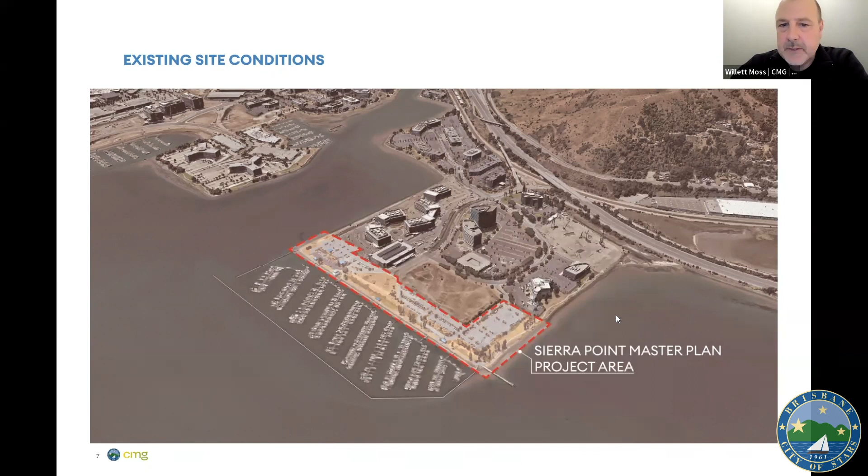Existing conditions are probably familiar to you, certainly to people that go down to the yacht club. North is up, essentially. The red line shows the boundary of the study area. You can see that the open space and parcels that are publicly owned are dominated by parking, with parcel R, where originally, in the master plan days, a restaurant was to land.

As you know, the Bay Trail wraps around and becomes the point of access and connection for the marina. It's also worth noting there's future retail proposed in the existing parking garage that anchors the ground floor right at its connection to the public open space, which we see as a benefit. Additionally, there are plans for a hotel on the parcel to the north that will also have an open space connection, with ideally co-benefits between the hotel operation and the public open space.

Again, it's worth noting how much open parking, although on private property, there is, including this garage I mentioned as the retail component.

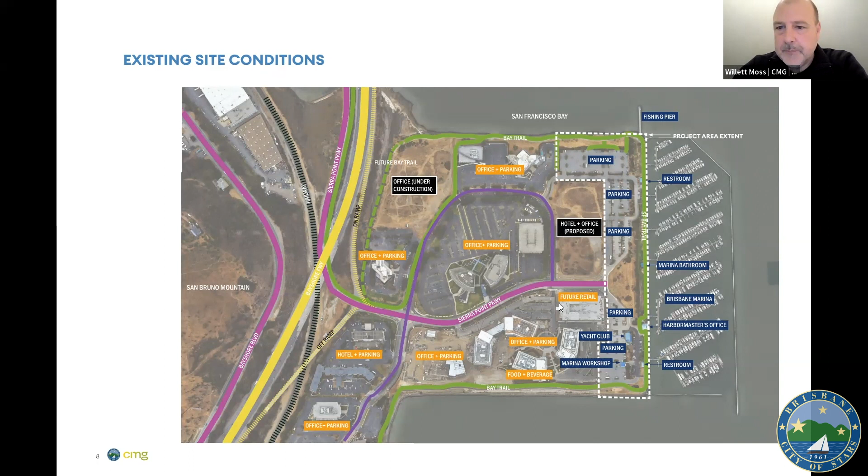This is a topographic map of the existing conditions, and we bring it up to note a couple things to keep in mind as we talk about the plans. One, it identifies where there are existing bathroom facilities, the yacht club, the harbor master's building, the marina workshop, and a significant trash enclosure upland.

The existing Bay Trail and the promenade that connects to all of the docks is at about an elevation of 9. King tide storm events, as we'll see in some diagrams, currently come up to about that elevation. I bring this up because much of our work is considering sea level rise and the projections for that and the implications on the site.

The other thing to note, as you well know, is that Sierra Point is a landfill. It's made out of garbage, rubble, and refuse, bound by a riprap perimeter. The green line on this plan indicates the top of slope of that landfill, which then quickly tapers down, sloping to the waterfront. This becomes relevant as we think about sea level rise and what amenities are outside of the projected sea level rise elevations.

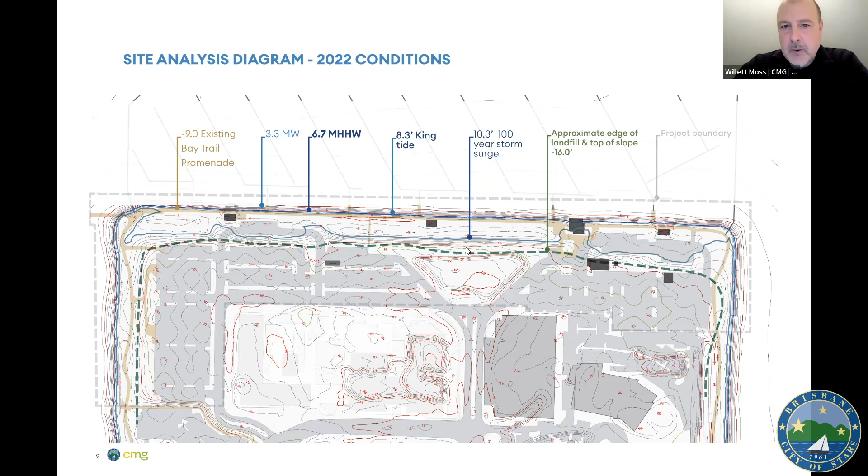Again, I want to note the bathrooms and Harbor Master's building in the context of all of this. Here we see a diagram section of the existing conditions, and you can see the 100-year storm surge, which is pretty much what we just experienced in the last few weeks.

It did overtop the parking lot that you can see, and it comes up through the drains also. Pretty dramatic image in the middle of the dock entrances in the recent storms.

So what we see in the section is that we're right at the level of extreme storm events. King tide comes up to just below the existing promenade without any wave action, and the landscape behind the esplanade is actually down below mean high water, around elevation 6.

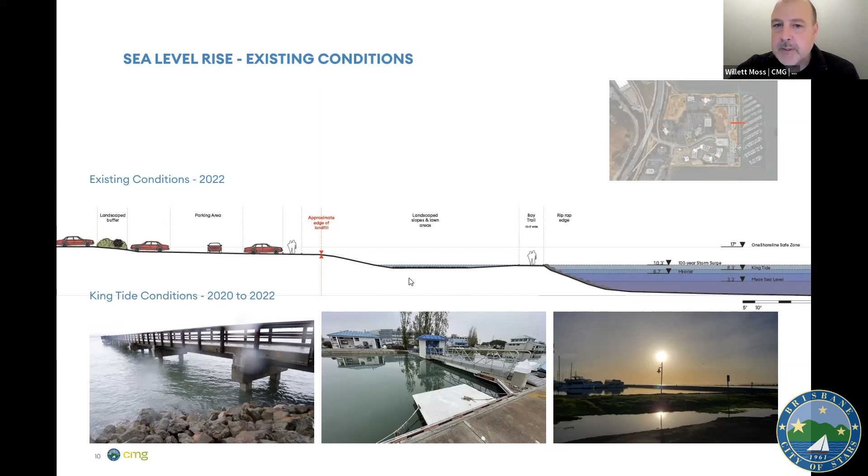So this sets up a series of conditions to consider relative to the long term. We use projections provided by the Bay Conservation and Development Commission, BCDC. They describe sea level rise in 2050, 2070, and 2100. We're looking at 2 feet of sea level rise by 2050 from what we have now, about 3.5 feet by 2070, and more than 6 feet by 2100.

Another jurisdictional point of consideration is the One Shoreline group working in San Mateo County, and they have established a safe zone for the 100-year projections at elevation 17. Now remember, the esplanade is at elevation 9, and the top of the landfill, fortunately, is around elevation 17. So this bodes well just in terms of sea level rise, when you don't think about all the other implications of water intrusion in the landfill and so on.

What it does bring to light is how the marina will be treated in the future. Will the docks be raised? Will the seawalls be elevated to meet these conditions? The marina is outside the scope of this project relative to the facilities outboard of the riprap edge, although we are keeping them in mind in the schemes.

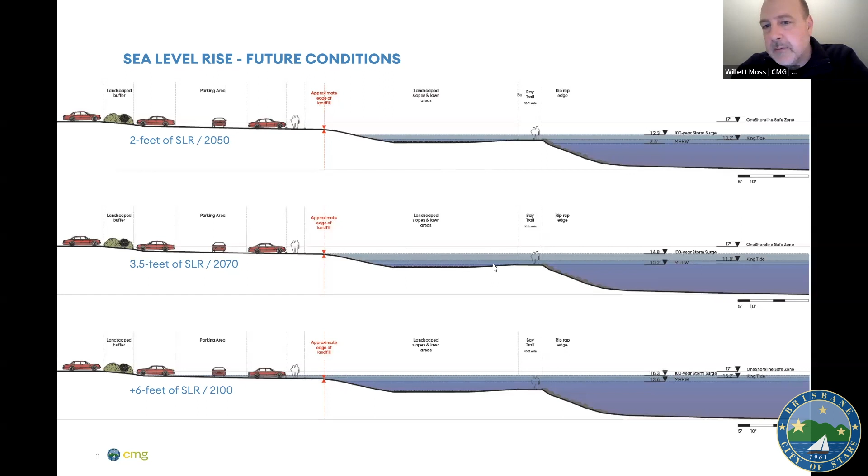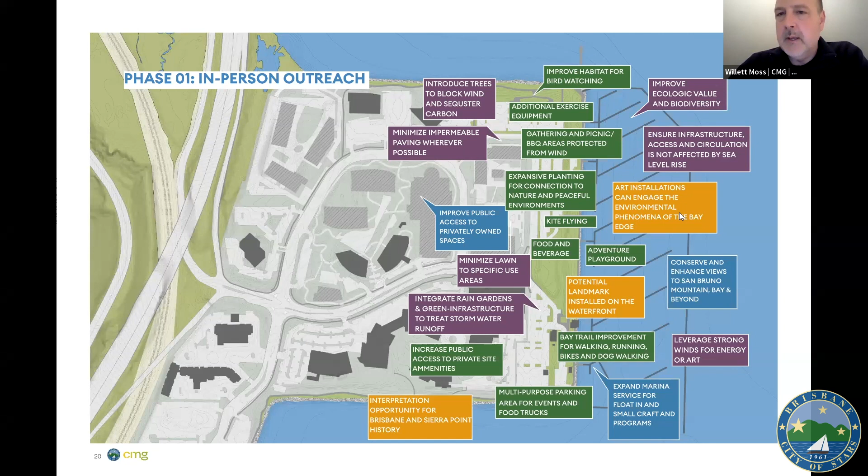So all of this is to say that we're hearing a similar voice across the board—that the marina will be maintained, the access to the broad views across the site, the bay, back to San Bruno Mountain, across to Mount Diablo and downtown—all of this is to be captured and heightened and improved upon. The call-outs here capture a variety of comments from our other interactions and meetings, like the day at the park and so forth, and conversation points. The yellow are specifically about art, the green are about program and amenities, and the purple are about resiliency. But they're all in line with what we see from the survey too, and little is contradictory to the main ambitions and goals we've heard from the city at large.

So as we think about all of these elements, we're also thinking about the structure of the open space and the site. To have any open space, we have to reduce the amount of parking.

There's about 11 acres of parking out on the site. We want to prioritize flexible open uses and spaces that meet multiple needs rather than having very fixed, very specific uses that limit the number of people. We do not want the park to include amenities and facilities that you can find elsewhere, either on Sierra Point in the privately owned public space or back in town.

Obviously, designing for sea level rise, as I showed in those diagrams, is of primary importance. We understand that there are many aspects of access to Sierra Point that need to be addressed. That's beyond the scope of this project, but we do know that access from downtown is key to the success of Sierra Point as a public open space for everyone.

We're designing up at about 60,000 feet. So it's broad gestures to establish character and quality, the kind of experience people hope to see, organizing the layout of the open space and the infrastructure broadly.

The master plan will be designed to continue the operation of the marina without changing its design. So the marina is valued and preserved. And certainly the critical facilities and circulation access will be maintained.

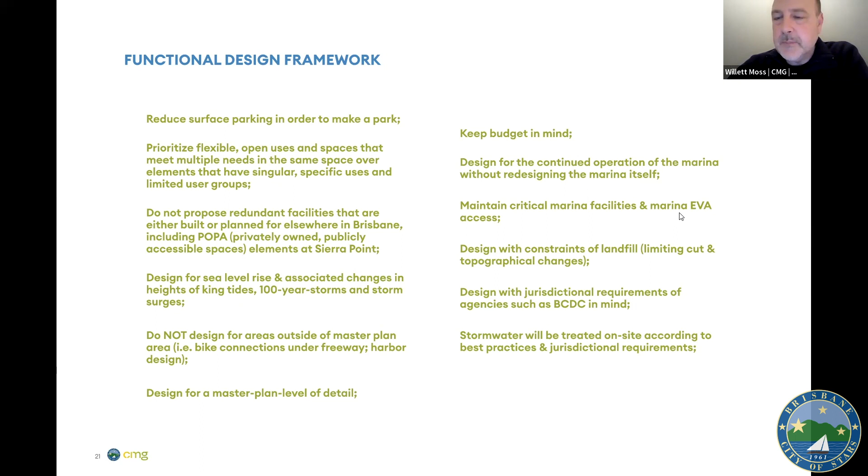The ambition is great efficiency. We have to design within the constraints of the landfill. There are weight limits on it and the cap, and what that poses to the design. BCDC, I mentioned, relative to sea level rise, and then treating stormwater is something that's integrated on site within rain gardens and planted facilities. So with all that in mind, I'm going to show you three schemes, but they have a basic organization that these diagrams describe.

There are existing facilities at the southern end, the right-hand side of the plan. These are the yacht club, the harbor master's building, the courtyard, and the shed. And also we're aware of the bathrooms down there, trash enclosures.

There is a perimeter condition that describes a functional zone. And then north of that so-called functional zone, we can imagine this is the area where we can start to modify that landscape, introduce planting, introduce new program.

Surrounding all of it, in anticipation of sea level rise, is a perimeter condition where we can start to accommodate and allow for water to ultimately inundate this area. And we're talking 30, 60, 100 years.

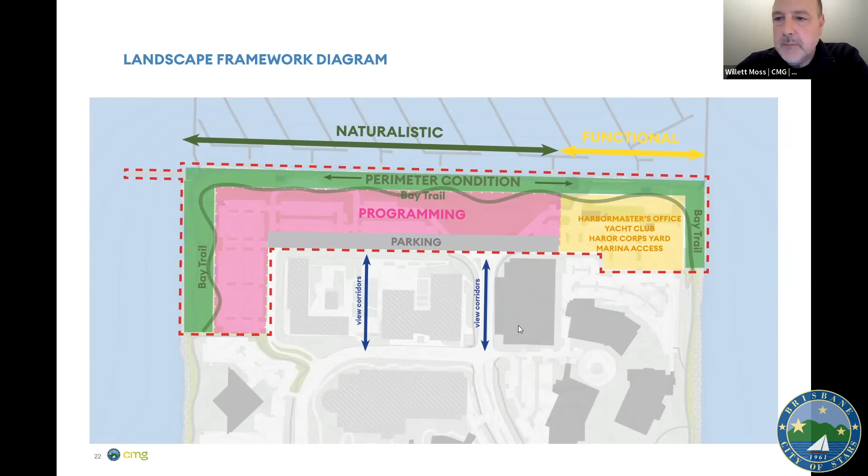Parking, obviously, is a major point of the conversation. The only attention to it at this time has been to suggest we can start to minimize it and right-size it. It's not to say we're not providing enough parking for the marina functions. We still have to figure out what those numbers are, especially in relation to the amount of parking that's offered off-site. If we think about weekend events where there's no one in the office buildings, there's an enormous parking garage adjacent to the open space, and there's a large parking lot.

This diagram is reinforced with planting strategies. So we would build upon the emergent wetland that's happening at the toe of the slope where water is already coming in, and we would create a native wetland environment along the toe of the slope and the edge of Sierra Point within this property. We would then transition to upland native plantings, and then there would be planting specifically for stormwater treatment that would pick up our paved surfaces and the parking areas.

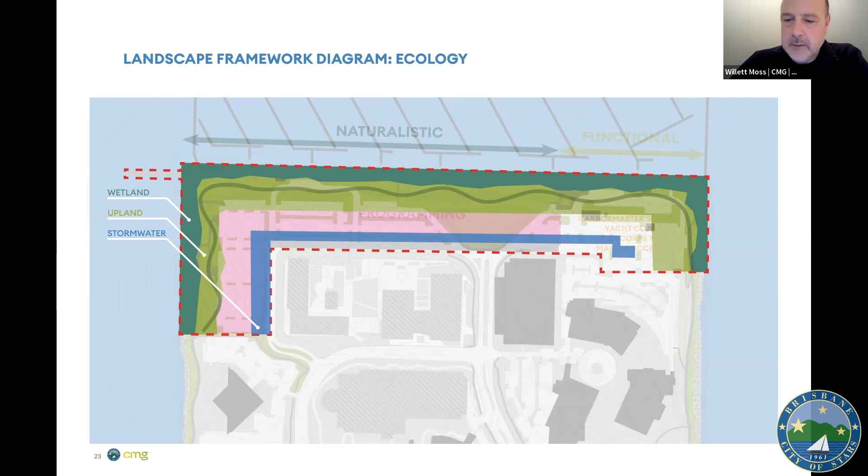Circulation is pretty straightforward in that we would maintain a BCDC compliant bay trail. I think the trail right now is about 9 feet wide. We would expand it to anywhere up to 18 feet wide. This allows for biking and jogging and walking. It allows for fire truck access to the docks and service trucks and vehicles. And then the parking areas would be served on the public lands from a loop road, essentially, that plugs back into the circulation of Sierra Point.

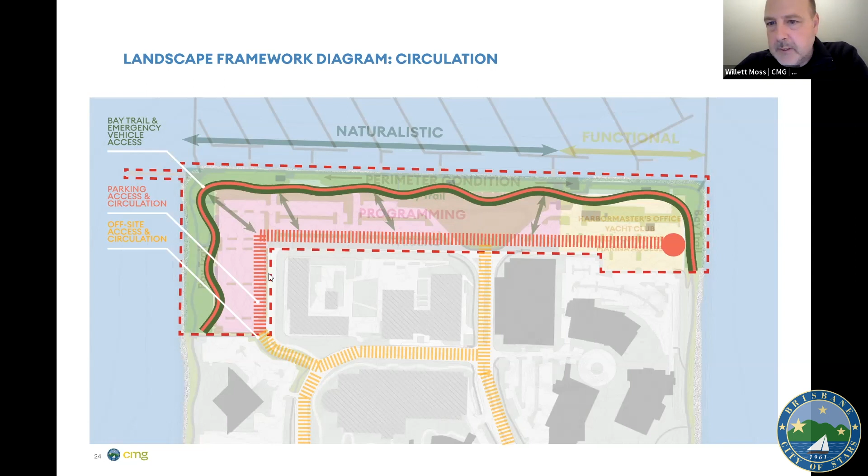So now I'm going to walk through three schemes, and as I mentioned, they each have common elements to them. What I want to note while we have these three up is that they're really distinguished by how they're treated at the north end, how they're treated at the southern end, and how they're treated in the middle, although these are more similar than how different they are between schemes at each of the ends. Being on site, you become really aware that the corners of Sierra Point become the most significant places and the most amazing of places when you're out there and you get those broad views across the bay.

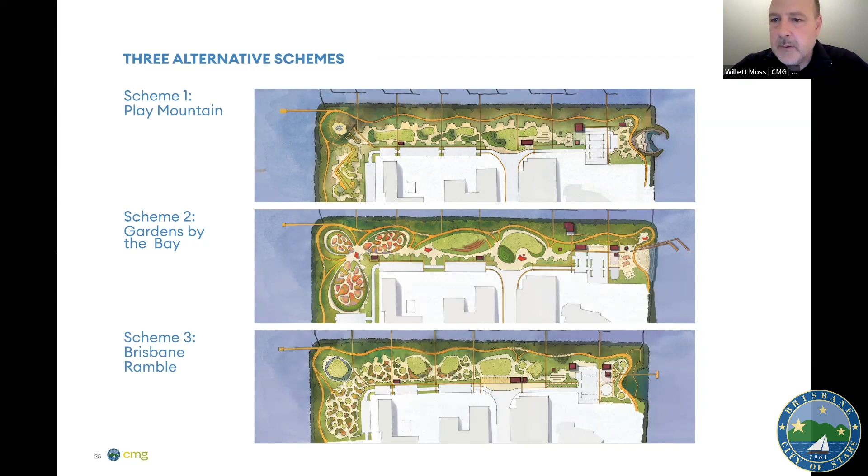Common to each scheme, we have native wetland and upland planting as described in the framework. We have a bay trail that's redefined with access to the marina, small craft launch, and multi-use lawns. I talked before about the value of having things that are multi-purpose, so you get more bang for your buck. Similarly with parking, we can think of these as plazas as well as parking lots when there's time and space.

Topographic features create unique environments and block wind and frame views. We're taking advantage of the incredible views across the bay with specific overlook moments and art installations that could be part of reinforcing or enhancing this experience. And our ultimate goal is to make a social environment.

Within all the schemes, although there aren't specific points drawn, there is an abundance of seating areas and picnic areas, group places, as well as places for individuals. Those aren't drawn on the plans, but they would ultimately be included and have been accounted for in the drawings.

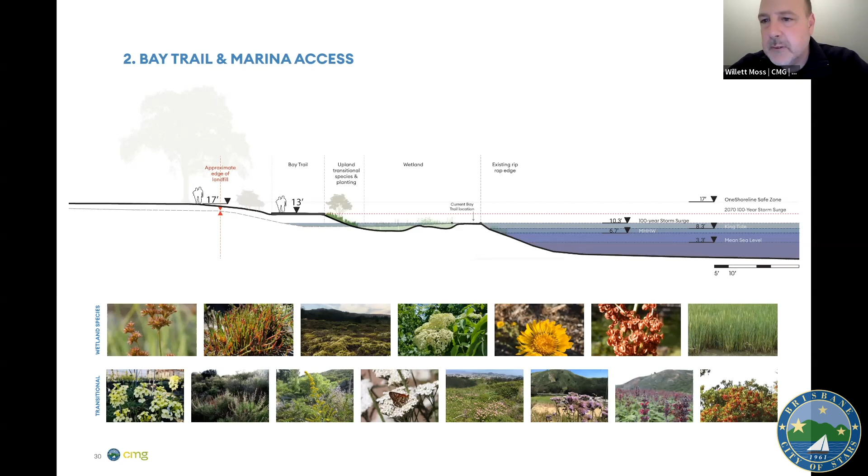We've heard from many that small craft launch and facilities are desired. There's a report, as I mentioned, by the city that describes its viability on the southern edge. So each scheme includes one of these launch facilities on the southern edge.

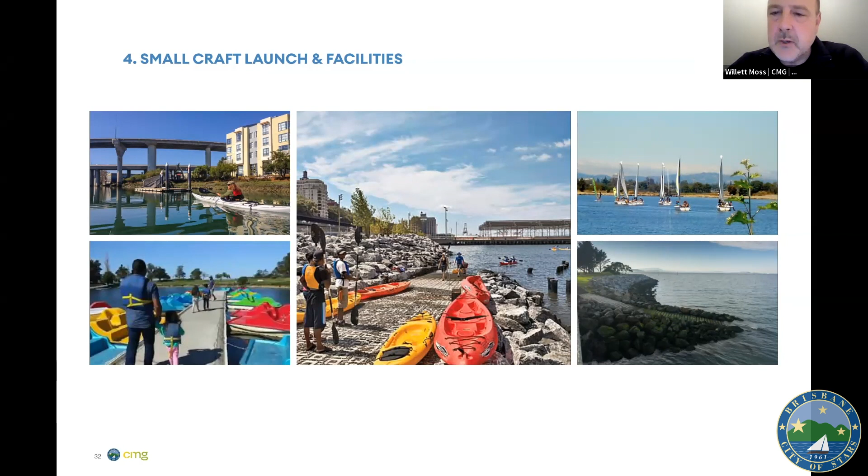We've also heard from many people about the opportunity for adding program for the boating communities. This is something outside the scope of this work, but we would want to include aspects of the design that could help fulfill new programs for water access.

Multi-purpose lawns, again, we talked about the value of just having flexible open space out there for various events that the city can run, and also just useful on a daily basis for people to throw a ball around.

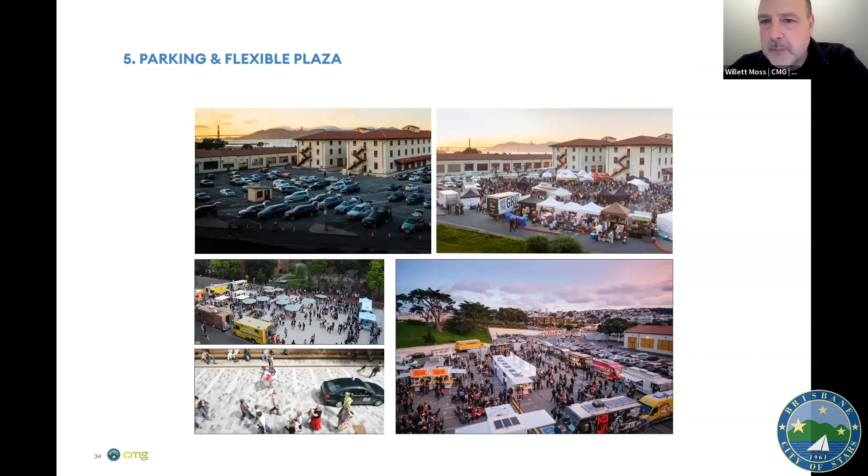Talked about flexible parking lots. It's an example on the waterfront, these slides at Fort Mason Center in San Francisco, where they take out their parked cars and create an off-the-grid pop-up.

We know that the city of Brisbane is beginning an arts master plan, and would imagine that consideration of Sierra Point art is included within that master plan development.

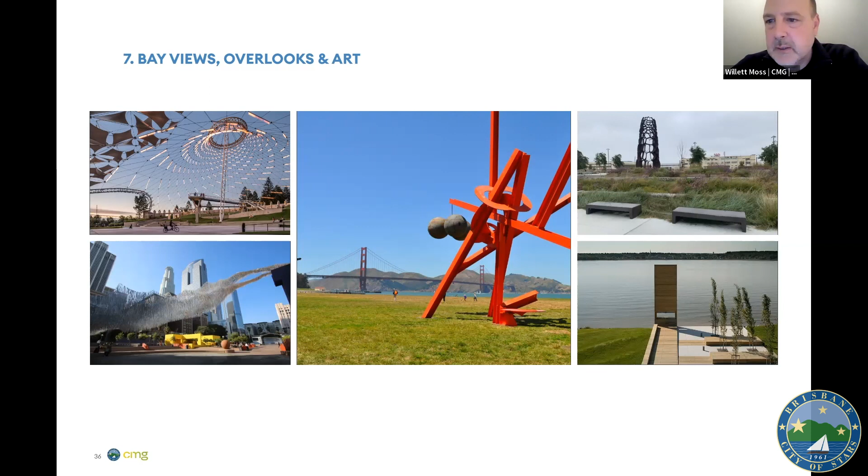And then finally, all of this is about connecting people to each other and to nature. Within all of these elements, as I mentioned, there are places for socializing and connecting to one another.

Okay, this is the last section, and we'll go through each of these schemes. Scheme 1 has elements that I'll mention here but are consistent with other ones. There's special attention paid to the north end and the south end, and a planting of trees along the perimeter to block wind and be a threshold into the park experience.

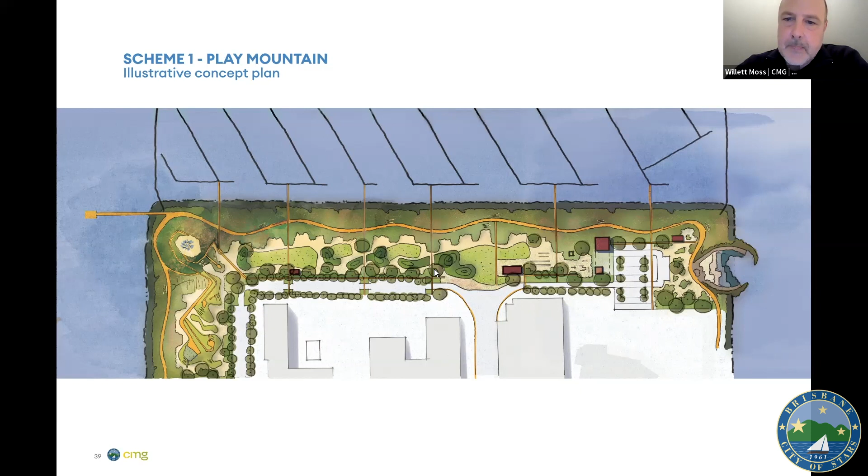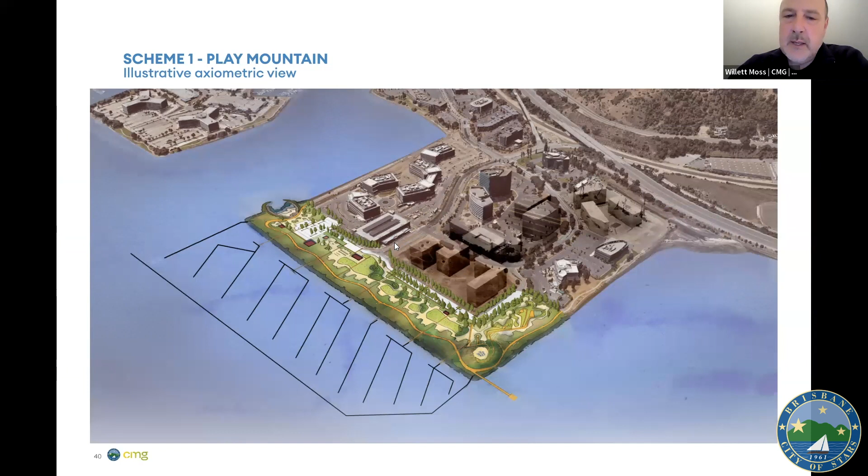Here we see a view looking down, with the trees in place. You can see them blocking wind, framing the parking lots, providing shade for parked cars. Again, the actual footprint of the parking areas is to be determined.

The multi-use parking lot is highlighted, but this is where the yacht club parking would be, marina parking. You can see the play features in this axon of what's called Play Mountain, the namesake of this scheme, and specifically the marine terraces and boat launch on the southern end.

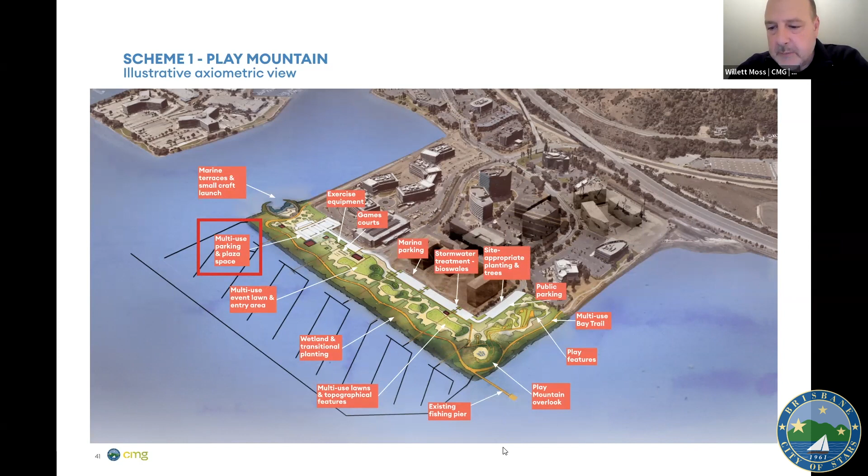You can see the transitional wetland to upland planting, this is all without trees, that frames the edge condition, and the bay trail highlighted in yellow. In every scheme, the fishing pier is maintained.

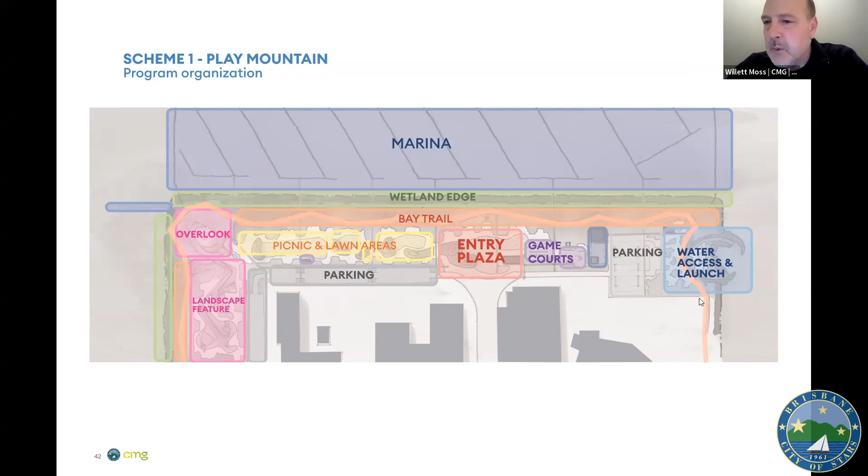In terms of how this piece is organized, it's what I just described. So we have a bookend, this overlook. Every scheme has an overlook that looks out over the bay - you can see Mount Diablo, you can see San Francisco. Here we have our landscape feature anchoring one end, a core central arrival point in the middle, and our southern bookend, which is the water access and launch that we're calling marine terraces.

Here you see those elements. So there is a distinct, unique lookout anchoring this moment. It could be elevated, you arrive and climb up, but it's also part of what we're calling Play Mountain as a more playful sculptural environment, potentially for all ages, framing views, blocking wind, but a place to run around.

Multi-purpose fields are in the middle of the open space. The yacht club has been moved in this scenario. The idea is that it could anchor with its own activity and vibrancy some of the central area, and it could...

...benefit from and contribute to more energy if the retail spaces at the bottom of the garage come online. So this becomes a more social area with food and beverage generally.

We did hear what prompted moving the yacht club was one of our community days when we talked to some people who said they were members of the yacht club and talked about its potential refurbishment and improvement.

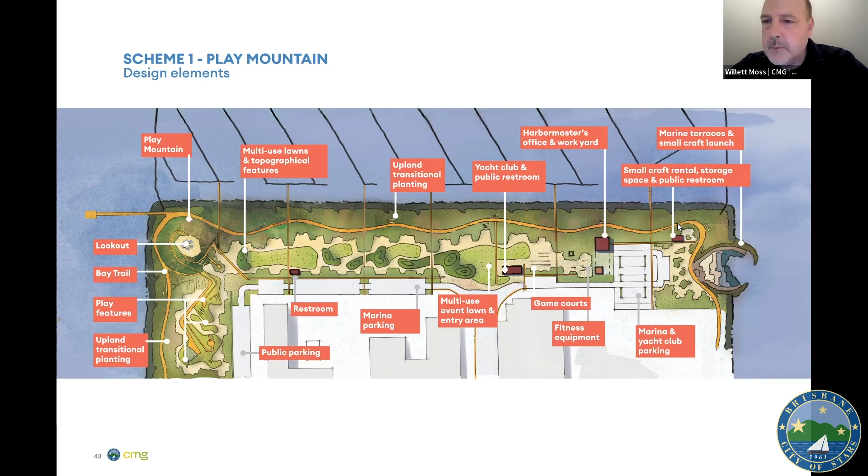The Harbor Masters building is moved up along with the work yard out of sea level rise conditions, and then public bathrooms are arrayed along the back with the new yacht club and a small craft rental facility at the end.

So we'll look really quickly at images that evoke what we imagine these could be. Play Mountain - I don't think there's anything like it in the Bay Area or on the West Coast - an environment that is not explicitly a playground, but can have elements of play incorporated into it, a place people can meander and wander around. You can sit and look at the views, but it also can be a compelling place to bring kids. Overall, a fun and delightful environment for exploration.

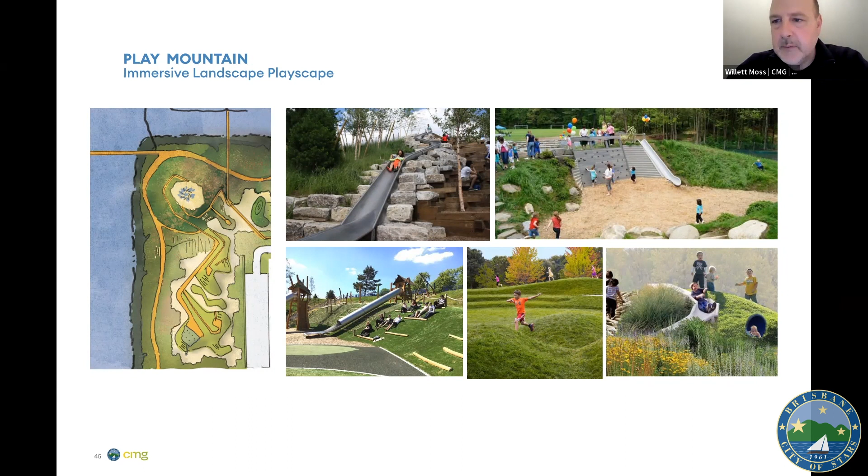Defined by earthwork, again acknowledging that there will be weight limits on the landfill, but within that, we think we can start to see some topography.

At the southern end, anchored by what we're calling the marine terrace - again, there's no other feature like this in the Bay Area we could imagine. So we'd specifically imagine a kind of constructed area for tide pools, watching the water come in and out. It could even be an outdoor classroom.

And this is where we imagine there could be a small craft launch, specifically as you see in the images on the bottom, which is in Brooklyn Bridge Park in New York City at the mouth of the harbor.

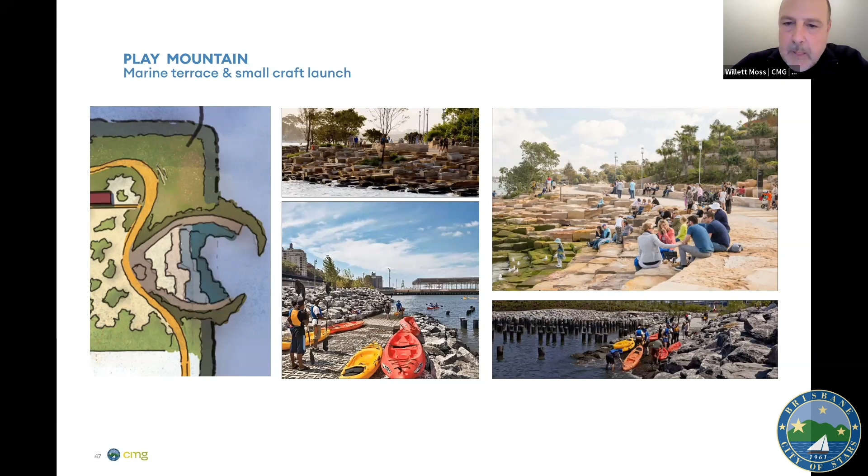This image shows an environment that's playful. At the northern end, you could climb up this hillock and look out across the bay, look back to San Bruno. And then the marine terraces that can register the tide and also have a wetland component and allow for water access that's safe.

Scheme 2, Gardens by the Bay. Similarly, as I said, the north end is anchored by one feature, the south end by another. In the middle here, we have more of an arrival plaza framed by earthwork, and then another open lawn with an amphitheater component looking out over the bay.

The Harbor Master's building stays where it is for as long as it possibly can. It's possible to even lose the ground floor and move all of their offices up to the mezzanine as sea level rises. The yacht club stays where it is. Game amenities are added in every scheme, and here you see the horseshoes and bocce ball expanded for the yacht club. Other rental facilities, bathrooms, and so forth are across the park.

We also see in this plan these red elements, and these are large-scale artworks that can be occupied, providing shade. They're interactive to some degree.

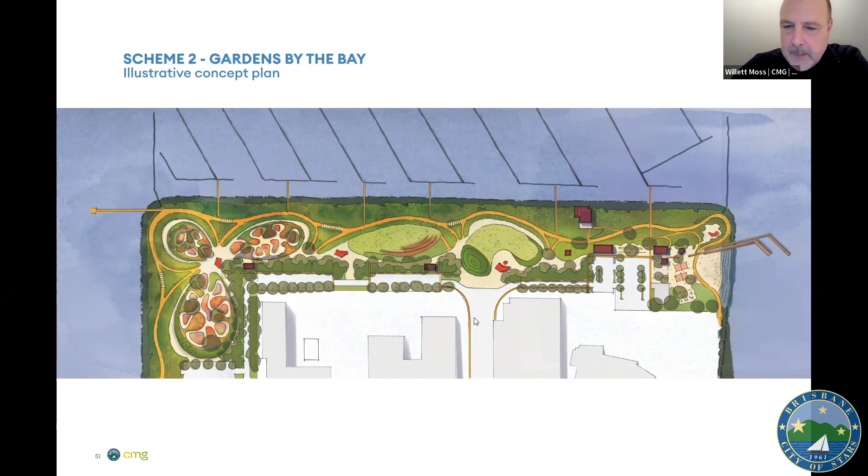Here's a view looking down with the trees. You can see these gardens that are on elevated earthworks that are tipped to the views across the bay or back to San Bruno Mountain. And on the south end, there is an artificial beach, of which there are many examples in the US now, most notably recently Crane Cove Park in San Francisco, which has been a huge success.

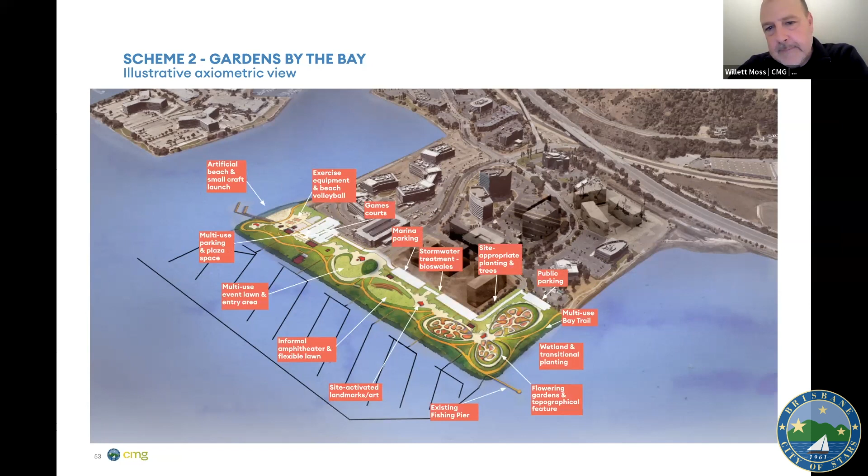Looking at the building blocks, again, we have this landscape feature, an immersive garden built on sloping earthworks that look out over different views. We have an amphitheater component, our central arrival point that's multi-purpose with plaza and lawn, and then water access in the form of a beach and dock that takes you out onto the water with seawall breakwater.

Here you see all these elements again illustrated. Note the beach experience is expanded. There's a muscle beach fitness area—people ask for more fitness equipment. There are beach volleyball courts that are part of this beach experience. You can see here the floating dock that would take kayakers out onto the water, and maybe small boats could come up for sailing classes.

Bathrooms are across the site, but they're back by the parking. And again, the harbor master's space stays where it is now.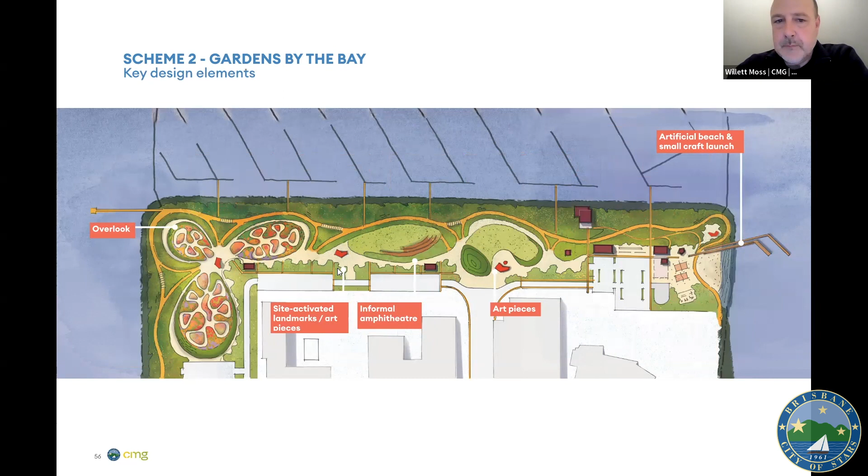One thing to note as a distinction between this scheme and others: you can see each of the existing docks plugging into the bay trail on this plan. That would mean that if you're parked upland, you actually have to navigate, move around, walk around to get to those. And we'll see in the prior scheme and in the next one, these are actually much more efficient. But what a wonderful walk it would be, right? Getting to your place.

So here you see the garden experience. Again, these elliptical gardens are elevated and sloping out to point to views across the bay. They are places that you can meander through, that you can picnic within, that you can hang out in, blocking wind and creating a kind of magnificent bowl.

Art in this scenario is more significant than the others, to the extent that it becomes an integral part of the plan, that they become landmarks along the way, and they are of scale. They're big places that you can inhabit or really encounter.

There is an existing so-called amphitheater on the site, but it's facing Oyster Point and it's kind of set back from the Bay Trail. This amphitheater could be as formal or as informal as people wanted. We've generally heard more informal the better, less formality, less structure. But here you're actually looking across the bay towards San Bruno Mountain, aligned with the boat slips.

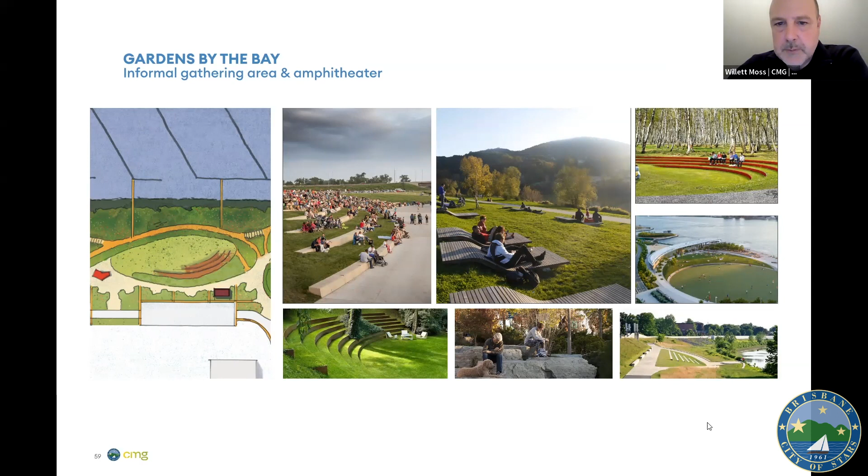Okay, Brisbane Ramble, Scheme 3. Here I want to point out the points of access to the docks that are straight and efficient. Consider now that there is one point of access that is the ramped bridge that takes you down to the Esplanade. There is a vehicular point of access at the northern end too.

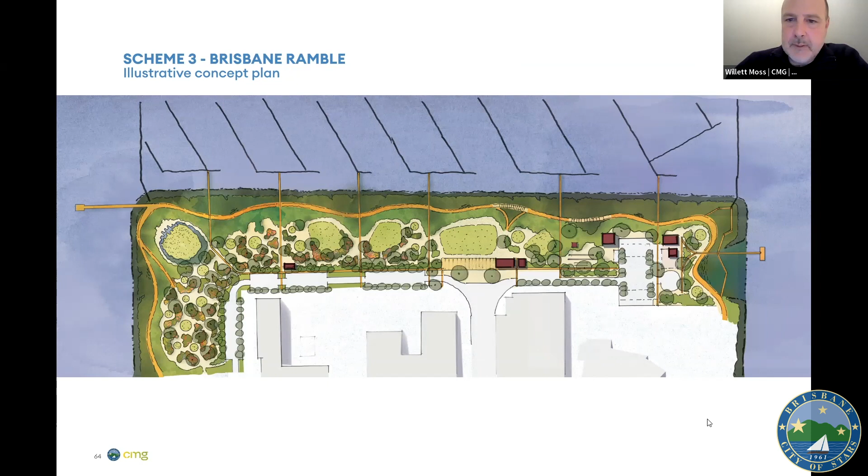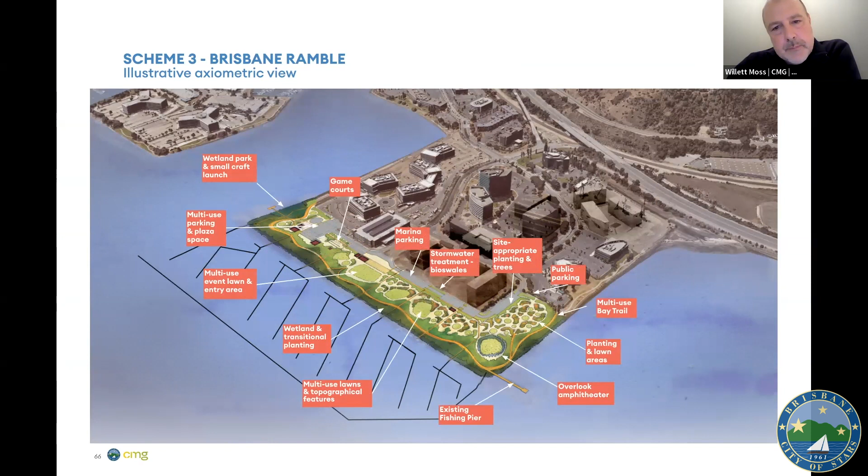Our Axon view, again, you can see the ramble, landscape experience, the overlook at the promontory in the northern end, anchored by the wetland park. And here you see those building blocks again, these discrete and significant landscape features that anchor one end of the site, the overlook, a pin in that corner, and the water access and launch wetland park at the other, with our core entry experience that's multi-purpose in the middle.

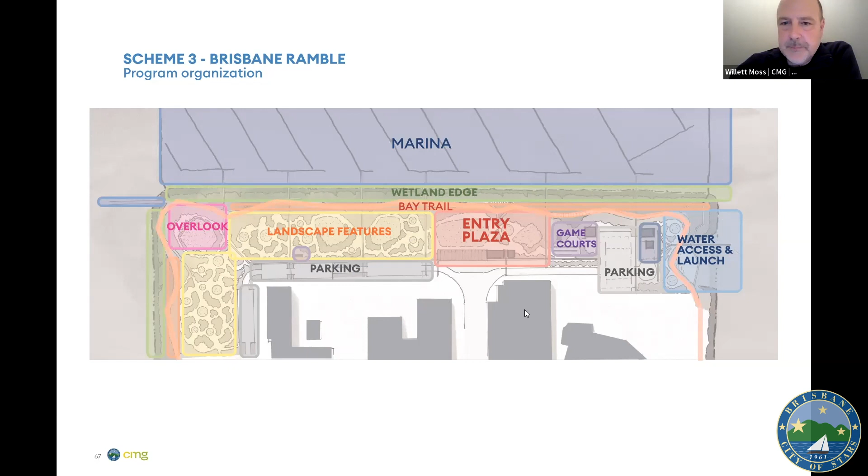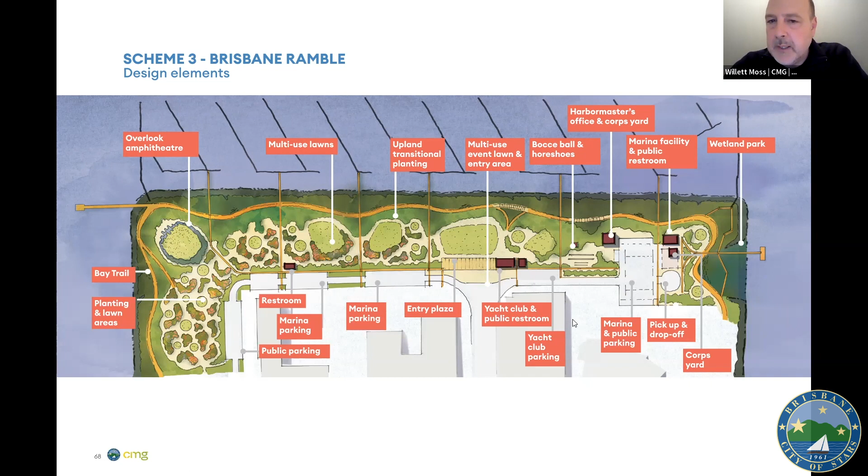So reminding you of just the consistent elements. We have the bay trail that's pretty much the same in every scheme. Sometimes we're showing bridges. It's to be determined, refined, developed over no doubt many years in terms of the plan moving forward. We have a unique feature at the southern end and a unique feature at the northern end. These are really the elements for getting feedback on. And then there are some technical aspects of the plan to work through relative to the parking counts and some other infrastructural considerations.

Looking at the overlook, the entry plaza and the wetland park, you can imagine a vegetated ramble that you can wander through, sit in, picnic within. Again, you can see the lawns that might be associated with special discrete areas. So while you can wander through as a family, you could pick one of these up for an event or just hang out.

The amphitheater on the end of the overlook, we're imagining something less formal or familiar as an amphitheater, but something much more playful, and possibly a large lawn that could just slope down and look out over the bay.

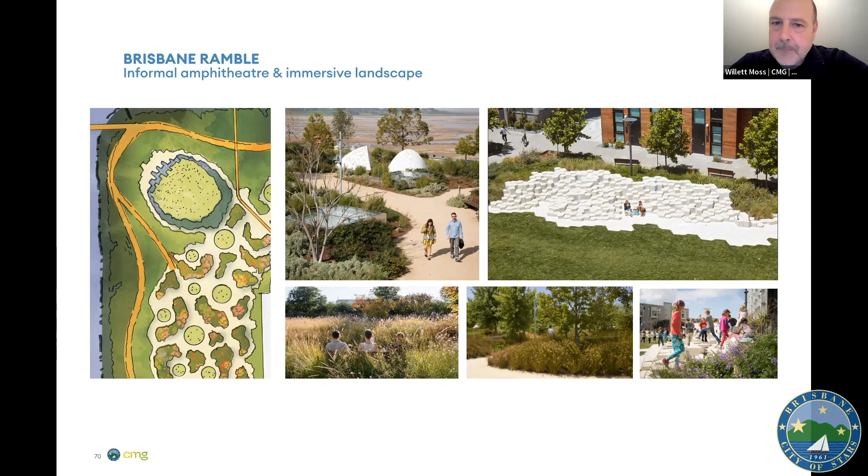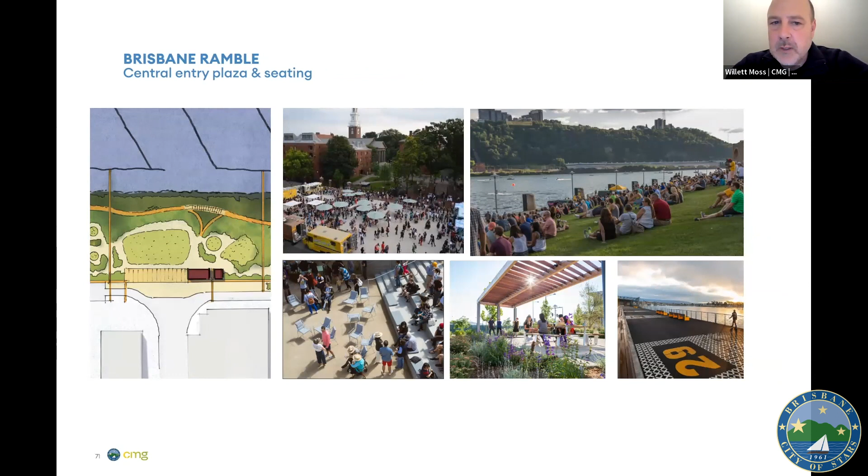In the middle, as I mentioned, really leveraging flexibility and multi-purpose aspects of a plaza and lawn area for large city events and celebration.

And then the wetland park on the southern end, it's an ecological park essentially that could be unique to this environment and frankly unique to the bay as something constructed from scratch.

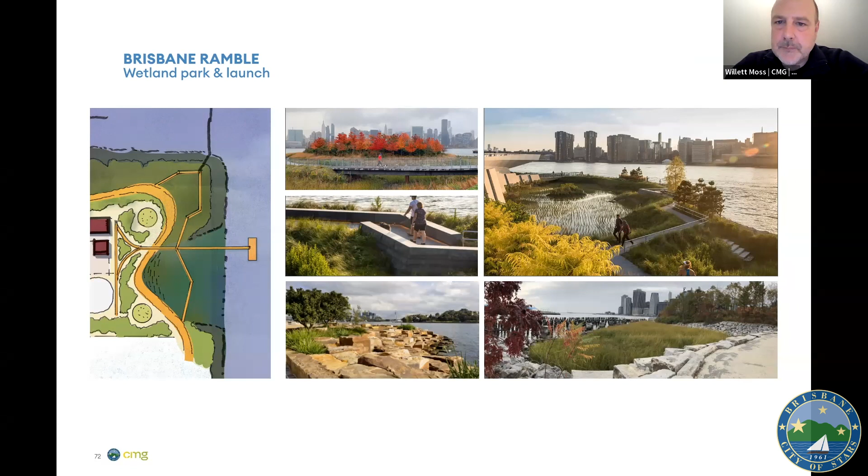Here we are looking southwest over what could be this wetland park.

So thank you for your patience. This takes us through our thinking and background and framing for these different schemes. They are to elicit conversation about character, identity, and experience.

All the while we are keeping in mind and designing for sea level rise as it's projected through 2100. And the marina facilities and the essential aspects of the site are to be maintained and enhanced. This is both views across the bay, access to the water, as well as the function and operations of the marina facilities and the yacht club.